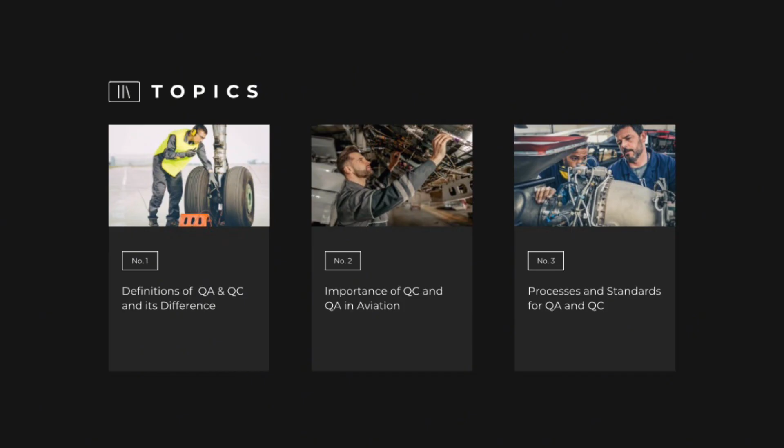So hi guys, we are going to discuss all about QC and QA, or quality control and quality assurance. So let's start. What is the difference between QA and QC?

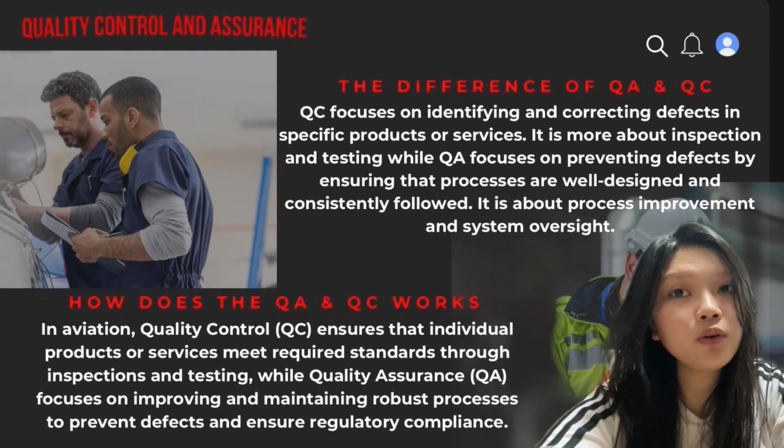QC focuses on identifying and correcting defects in specific products or services. It is more about inspection and testing, while QA focuses on preventing defects by ensuring that the processes are well designed and consistently followed. It is about process improvement and system oversight.

So how do QA and QC work? In aviation, quality control or QC ensures that individual products or services meet required standards through inspection and testing, while quality assurance focuses on improving and maintaining robust processes to prevent defects and ensure regulatory compliance.

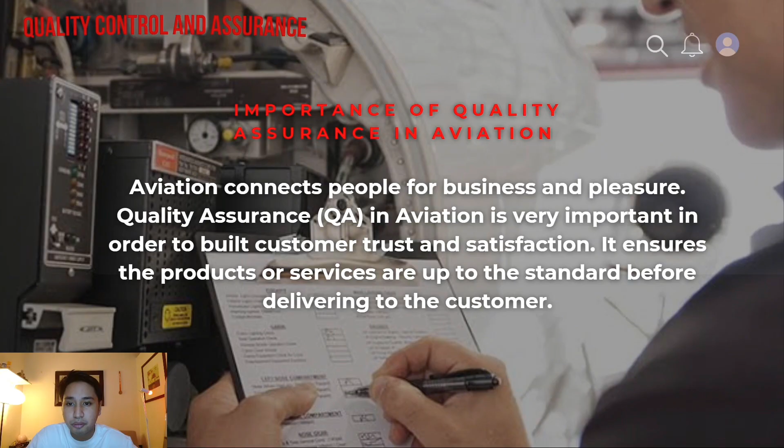And the next one is the importance of quality control in aviation. Quality control also ensures that all aircraft maintenance is performed in compliance with appropriate standards. Effective quality control systems are critical in aircraft maintenance because they reduce the need for rework.

And the other importance of quality control in aviation is, number one, safety. Quality control ensures that aircraft maintenance is done correctly, following strict standards to keep flights safe for passengers and crew. Number two is compliance.

Quality control helps ensure that maintenance meets all regulatory requirements, keeping airlines in line with safety laws and industry regulations. And number three, efficiency, with effective quality control systems.

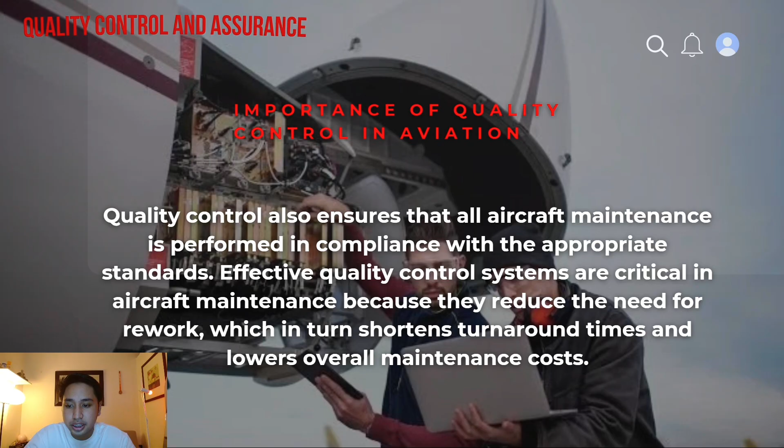And lastly, cost savings. Fewer mistakes and less rework mean lower maintenance costs. Quality control helps airlines save money and avoid delays by ensuring maintenance is done quickly and accurately.

Key practices of quality assurance and quality control. In the aviation industry, both quality control and quality assurance play critical roles in ensuring the safety, reliability, and compliance of aircraft and their components. Here are examples of key practices.

Number one is aircraft inspections. Routine inspections, performing regular checks such as A checks, B checks, C checks, and D checks, which involve thorough examination of the aircraft structure, engines, and systems.

One primary example of aircraft inspection is a technician inspecting the fuselage for cracks, corrosion, or other visible damage and testing systems like hydraulics and electrical components during a scheduled maintenance check.

Number two, non-destructive testing. Methods like ultrasonic testing, X-ray, and eddy current testing are used to detect flaws in critical components without damaging them, such as using ultrasonic testing to detect microscopic cracks in the wing structure or engine turbine blades.

Number three, component and part quality inspection. Inspecting spare parts, components, or materials used in aircraft maintenance to ensure they meet manufacturer specifications and are free from defects.

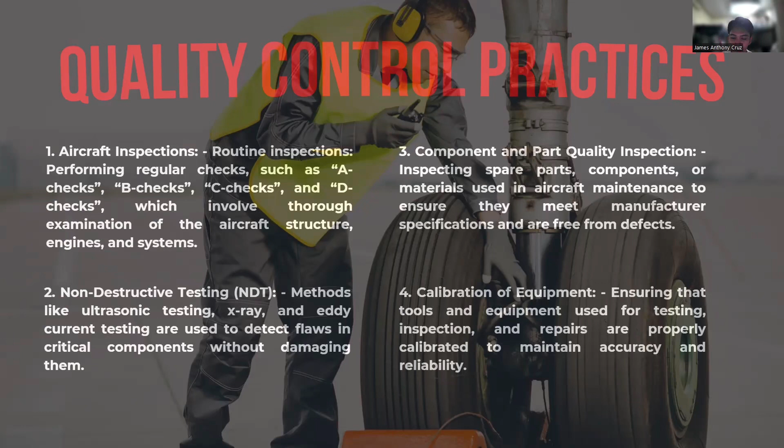Quality assurance practices. Number one, compliance with regulatory standards, ensuring that all maintenance and operations comply with aviation regulations set by authorities like the FAA, EASA, and ICAO, verifying that maintenance procedures adhere to the latest AC-145 repair station certification and repair station regulation.

Training and certification: ensuring that personnel, including pilots, maintenance technicians, and engineers, receive the necessary training and certificates to perform their duties. So, of course, all personnel must have a license, a proper program, and certifications.

Safety management system: implementing and monitoring systems that proactively identify, assess, and mitigate safety risks, ensuring continuous improvement in aviation safety.

And number four, continuous improvement, promoting a culture of continuous improvement using methodology like root cause analysis to optimize maintenance processes, reduce errors, and enhance safety.

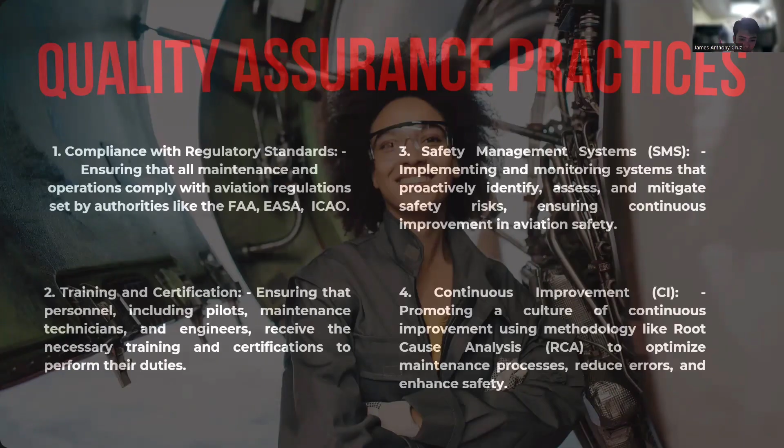Number 5, challenges in quality assurance, QA. Quality assurance in aviation maintenance faces several challenges, including regulatory compliance.

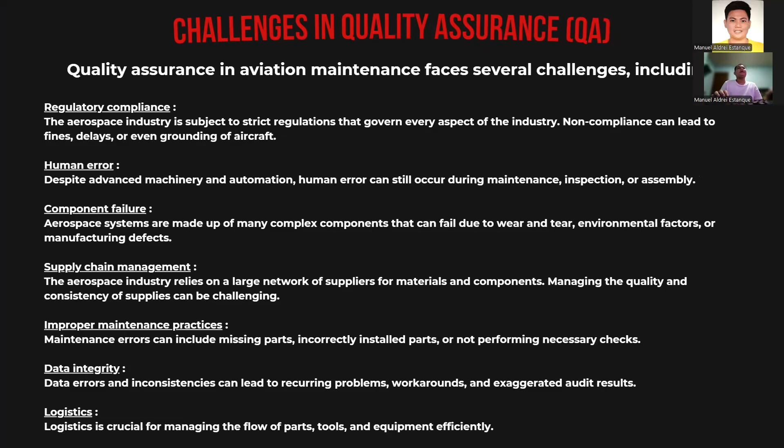The aerospace industry is subject to strict regulations that govern every aspect of the industry. Non-compliance can lead to fines, delays, or even grounding of aircraft.

Next is human error. Despite advanced machinery and automation, human error can still occur during maintenance inspection or assembly.

Component failure. Aerospace systems are made up of many complex components that can fail due to wear and tear, environmental factors, or manufacturing defects. Supply chain management.

The aerospace industry relies on a large network of suppliers for materials and components. Managing the quality and consistency of supplies can be challenging.

Next is improper maintenance practices. Maintenance errors can include missing parts, incorrectly installed parts, or not performing necessary checks.

Next is data integrity. Data errors and inconsistencies can lead to recurring problems, workarounds, and exaggerated audit results.

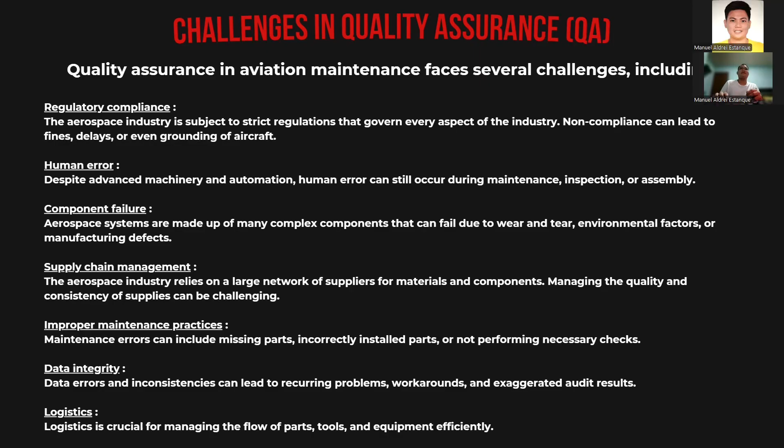Next is logistics. Logistics is crucial for managing the flow of parts, tools, and equipment efficiently. So that's for QA, or quality assurance.

Next, challenges in quality control. Quality control in aviation maintenance faces a number of challenges, including safety.

The airline industry has strict regulations, with aircraft maintenance playing a crucial role in ensuring aviation safety. Failures in maintaining aircraft can lead to irreversible damage or even fatalities.

Regulations and demand: the aviation industry is facing increased regulation and demand. Next is deteriorated parts. Aircraft parts and structural components may degrade as a result of environmental factors such as corrosion, wear, and fatigue. If these components are not identified and fixed promptly, they may malfunction during use and impact the aircraft's safe functionality.

Next is regulatory compliance. The aerospace sector needs to adhere to stringent safety and quality standards of great depth and complexity. Next is communication. It is crucial to regularly communicate with staff members to ensure they are feeling healthy, properly equipped, and adequately shielded. Without prompting, they may not always feel at ease expressing their concerns.

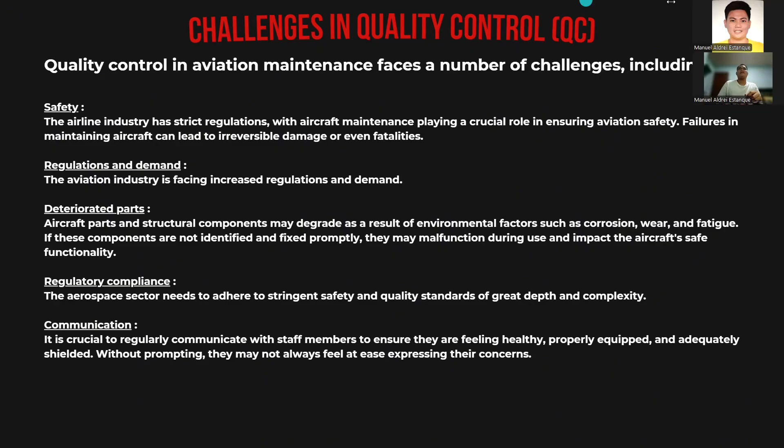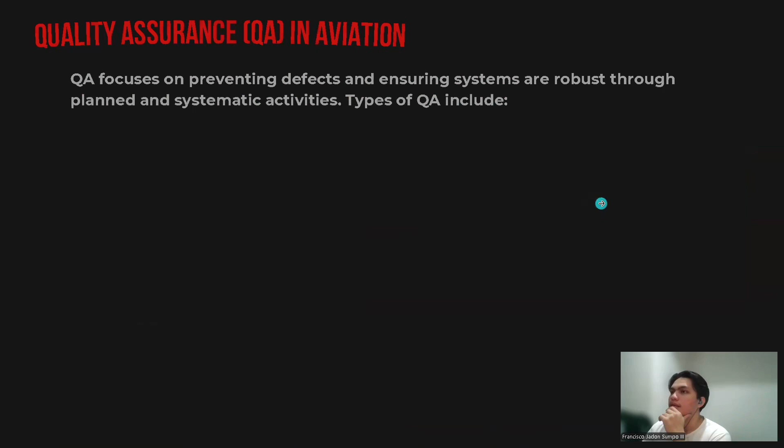So the next topic we have is the different kinds of quality control and quality assurance and how it's done. Quality assurance in aviation focuses on preventing defects and ensuring systems are robust through planned and systematic activities.

The different types of QA include: first is compliance audits, where we verify adherence to aviation regulations, examples being the FAA and EASA, and internal policies such as maintenance procedures, operational manuals, and safety protocols.

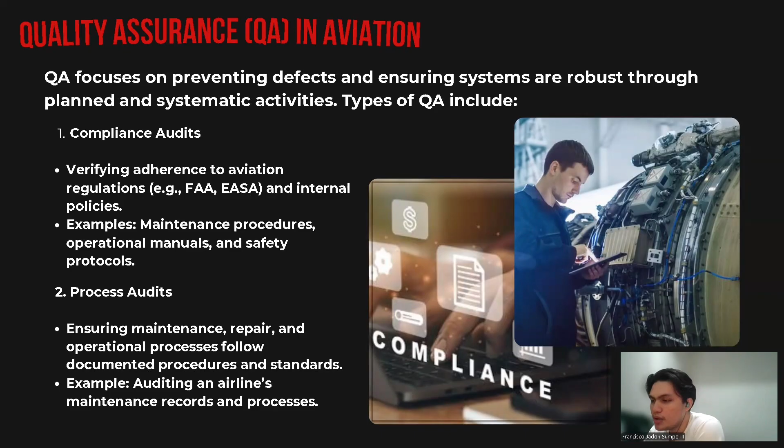Next we have process audits, ensuring maintenance, repair, and operational processes follow documented procedures and standards. Examples for this are auditing an airline's maintenance records and processes.

Next we have supplier quality assurance, evaluating and monitoring suppliers and contractors to ensure their products and services meet aviation standards. Example for this is inspecting part suppliers for conformance to AS9100 standards.

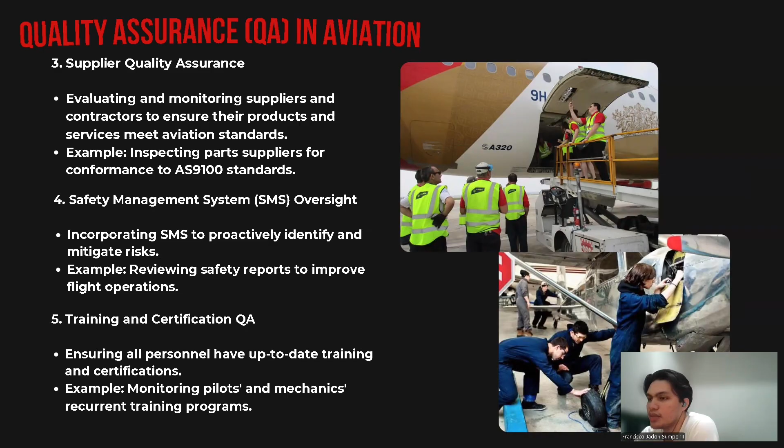Next we have safety management system, or SMS, oversight, incorporating SMS to proactively identify and mitigate risks. Example is reviewing safety reports to improve flight operations.

And last but not the least, for QA we have training and certification quality assurance, ensuring all personnel have up-to-date training and certifications. Examples are monitoring pilots and mechanics' recurrent training sessions and retraining programs.

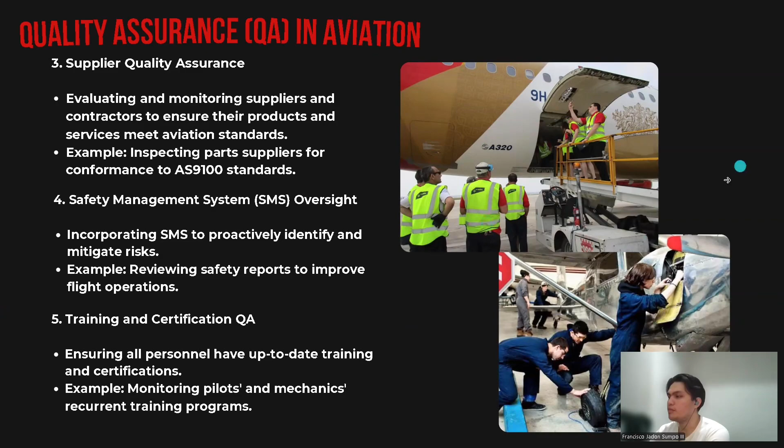Next we have quality control in aviation. Quality control ensures that the final product or service meets specific standards. It involves inspection and testing.

The different types of quality control include incoming inspection, checking the quality of parts and materials delivered for manufacturing and maintenance. Example for this: inspecting aircraft components for damage or non-conformance before installation.

For number 2, we have in-process inspection, monitoring and verifying work during maintenance or manufacturing. Example is inspecting rivet installations on an airframe during assembly.

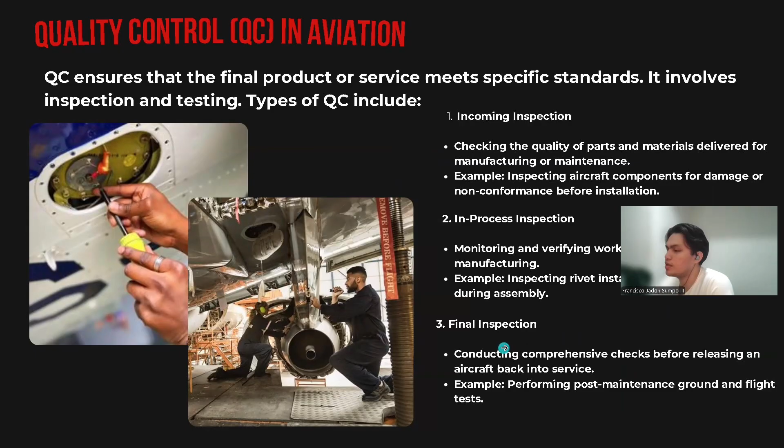For third, we have final inspection, conducting comprehensive checks before releasing an aircraft back into service. Example is performing post-maintenance ground and flight tests.

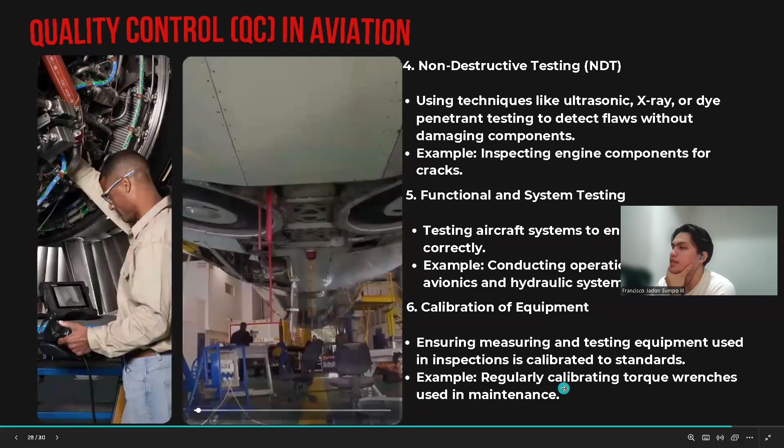Next we have non-destructive testing. This is for the picture on the left. Using techniques like ultrasonic, X-ray, or dye penetrant testing to detect flaws without damaging components. Example for this is inspecting engine components for cracks using dye penetrant testing.

Next we have functional and system testing, testing aircraft systems to ensure they operate correctly. Examples: conducting operational checks for avionics and hydraulic systems. Here's an example of that.

So as seen on the video, they're testing whether the landing gear of this specific aircraft works properly.

Last but not the least, we have calibration of equipment, ensuring measuring and testing equipment used in inspections is calibrated to standards. Example for this is regularly calibrating torque wrenches used in maintenance.